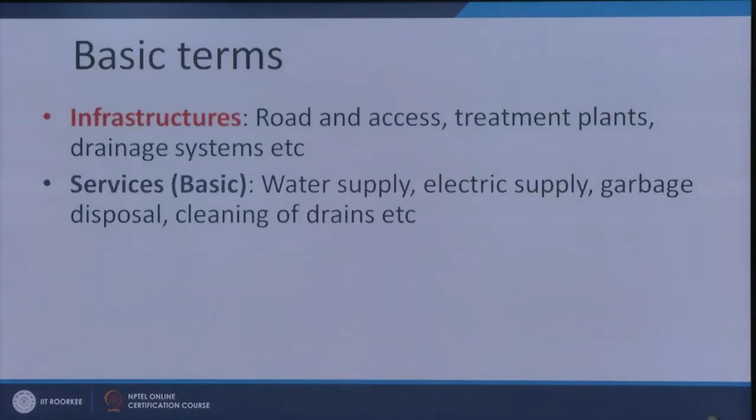But apart from the physical infrastructure, there are community facilities, which are required as an essential part of housing development. These community facilities are sometimes called social infrastructure, but they also need substantial land space and substantial investment to make it livable, to make better quality housing development. So, we discussed the objective of infrastructure is creating basic infrastructure, providing facilities and amenities and delivering accountable service. These are the basic terms we mentioned. We are not going into much detail today.

We mentioned that infrastructures and services are planned at various levels, starting from the city level to the local level, and these are the norms we mentioned: URDPFI guidelines, NBC National Building Code, Electrical Code, CPHEO manual, which is basically the public health manual dealing with sewerage sanitation and waste management. And apart from that, there could be local rules and regulations framed by the municipal authorities and development authorities from time to time.

So, after that let us see some of the norms of social infrastructure. When we say social infrastructure, there are educational infrastructures, from the very elementary school to the technical college or the university and college system, and the health system, from neighborhood clinics to the district hospital or sub-district hospital level, and also there are community facilities. So, we are going to show you some of the norms for social infrastructure given in the URDPFI guidelines, Government of India.

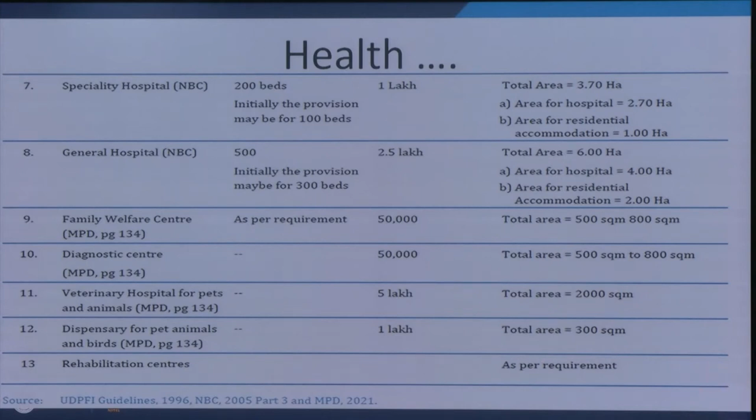So, a specialty hospital can come at 1 lakh or more, a general hospital at 2.5 lakh; usually the general hospital comes for a mid-size city of 2 to 5 lakh population. A family welfare center can come at 50,000 population. Apart from all these facilities, a separate diagnostic center could be there; private or public authorities can develop such centers. Then veterinary hospital for pets and animals, and rehabilitation center; these are different kinds of health facilities required for different housing or township development.

In the later part of this lecture series, we will discuss the old age home in greater detail, but please take note that earlier we used to treat this as a cultural facility, but now we treat this as a very important housing typology, because over the period of time this typology is going to increase and there will be more requirement for old age homes.

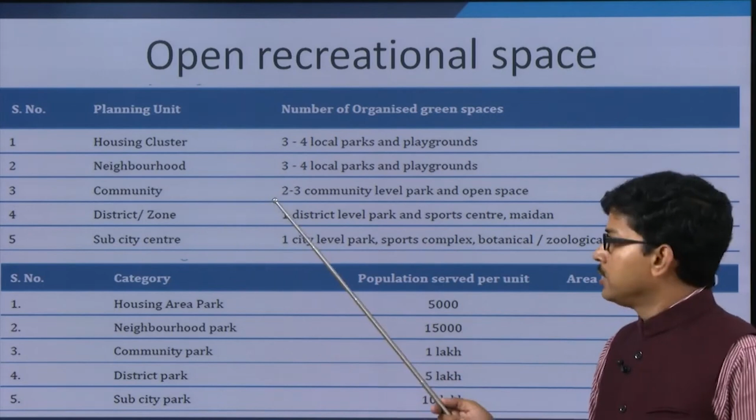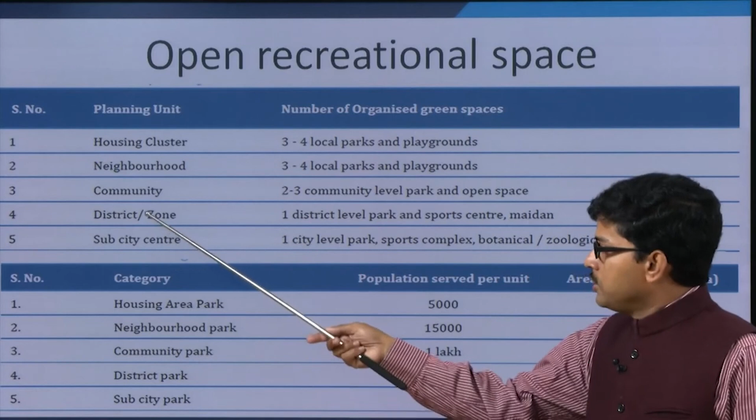At the community level, sometimes we call it a sector or block, the name can be different, but the concept should be clear. The community level park should be serving about 1 lakh, it can be a little less than that also based on your planning of the city, and it will have 5 hectares of area. Similarly, we have district or zone or sub-city level parks, which are much bigger than the lower level. You can see 25 hectares and 100 hectares.

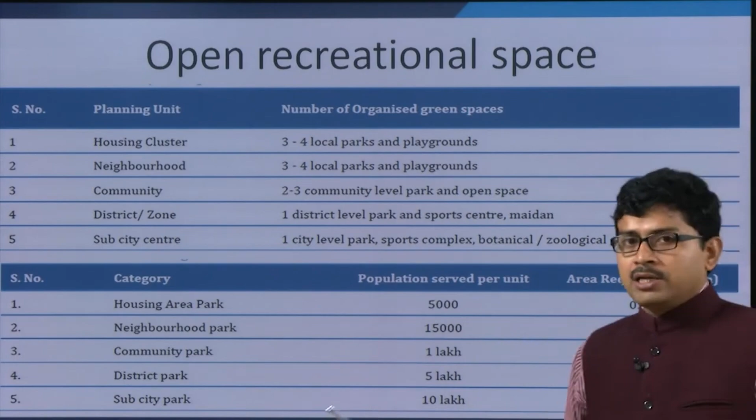So in a city or in a housing area, the overall area required for the green areas ranges from 10 to 15%. So it is not a very small amount of area. Out of 100% of the total area, 50 to 60% goes to net plot of the residential use, net plot for the housing, another 10 to 15% goes to traffic and transportation, another 10 to 15% goes to open recreational area, and the remaining areas are meant for the other community facilities including health, education and commercial areas.

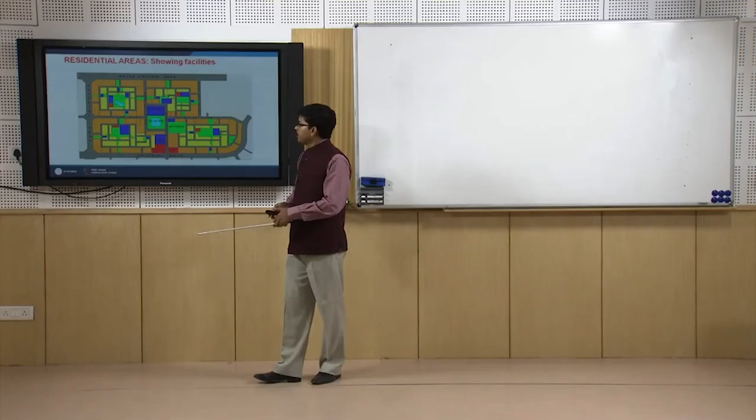So, we see this picture again. In the last lecture also we took this example, the typical layout of a neighborhood cluster. Here we can see that 4 neighborhoods are there, the plot layout plan 1, 2, 3, 4, and the blue colors you can see are the educational facilities: these are the higher secondary schools, these are the primary schools within the neighborhood, and the small blue areas are the elementary schools.

Similarly, the red colors show the commercial facility at the sector level or at the neighborhood level, where the convenience shops will be, and similarly the green and the blue show the open areas at different levels.

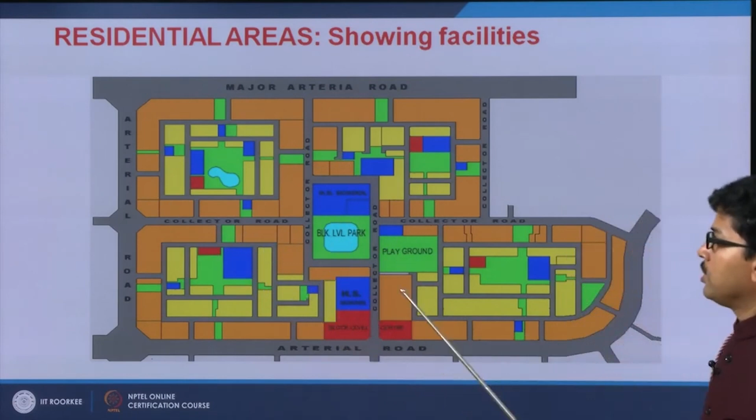These are the centralized open areas at the sector level, whereas these green areas are servicing the neighborhood and the cluster. For example, this green area is servicing this cluster, so that people from this side and that side can come and enjoy, whereas this green area and the water body can be enjoyed by all the people living in this neighborhood. So, this is an example by which you can understand how the social facilities are placed and how the local roads are connected with the residential area.

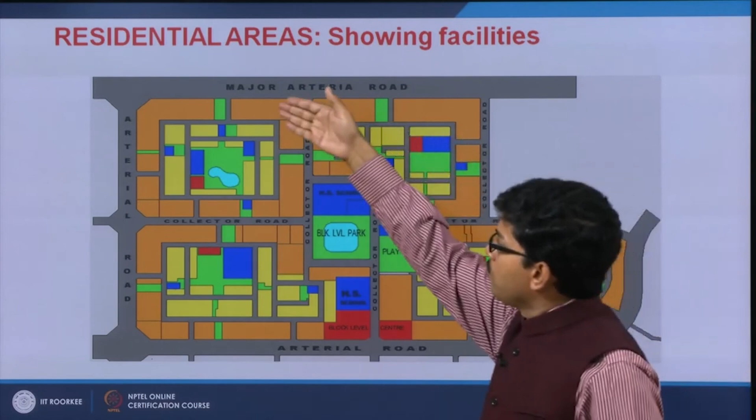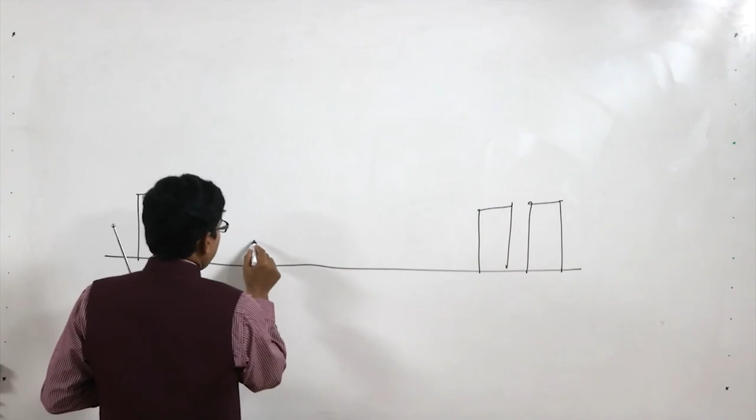Now, last discussion we discussed the development control. You can see that here we have used two sets of colors for the residential area, one dark yellow and one lighter yellow. These two colors show the different prescribed heights of the buildings. By and large, the concept is that if this is a neighborhood, then your peripheral buildings could be high rise and your internal buildings could be a little low rise, and this could be road. And the internal space could be used as a green area.

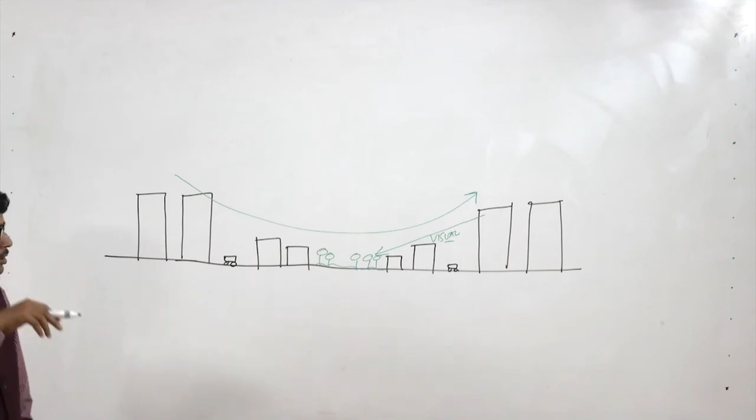So, this is done to ensure adequate light, ventilation and visual continuity, so please connect with our discussion related to the building controls and the urban design. Based on that, two different types of building typologies or building envelopes are considered and placed at the periphery and the center of any neighborhood. It could be different also, it is just an example to help you understand how it works.

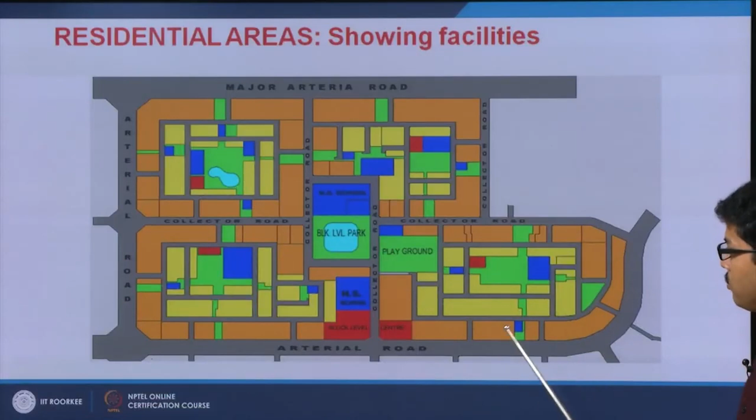Not only that, in the internal layout of the neighborhood, you can see that local roads are there. Local roads can be connected with other local roads, and a local road can also be open ended, or close ended, which we call a cul-de-sac, which will serve only the internal plots. So how these local roads, the space for the community facilities, and green areas act together, that is a very important thing to see.

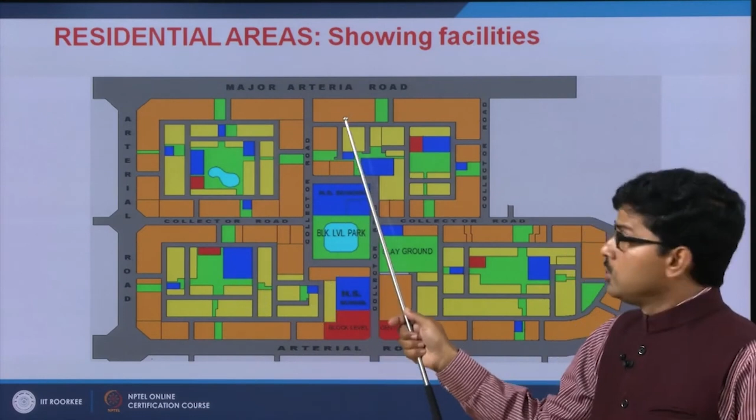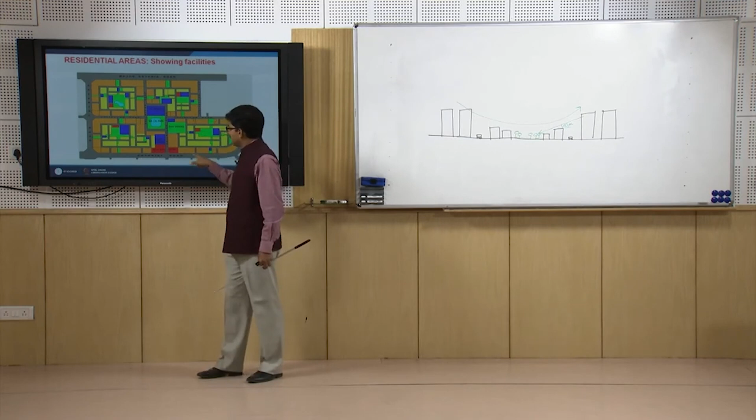Another very important part to be observed is that the major arterial road, the arterial road and the subarterial roads are also connected with the local road and the collector road, but these will not open up into the main carriageway, they will open up only into the service road. Please recall our discussion in the last to last lecture when we displayed the typical section of an arterial road, subarterial road and local road. So this connection of the local road and the arterial road is not direct, so this is not an intersection, this is only meeting with the service road.

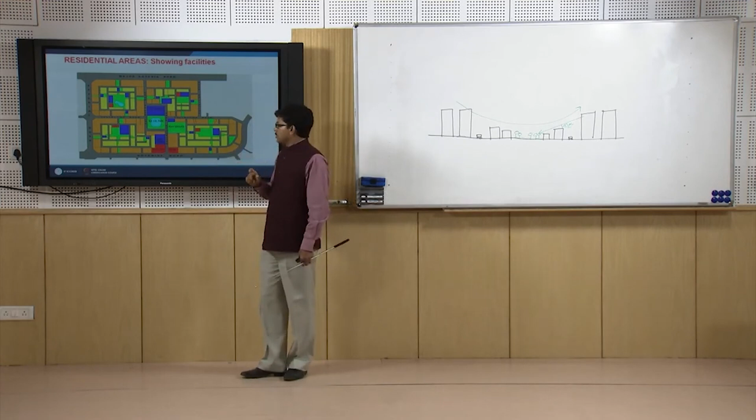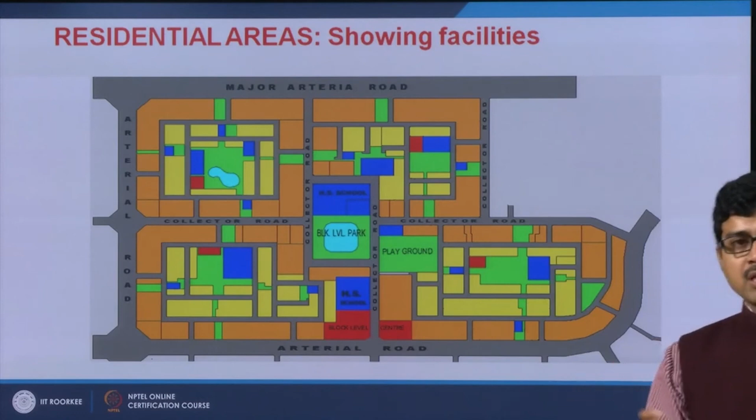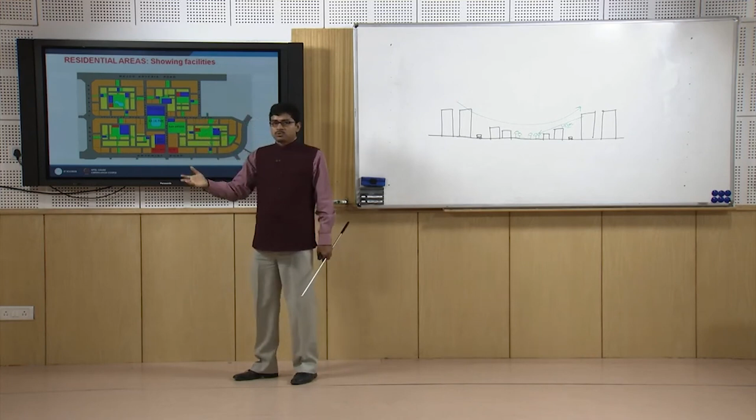So that is how we physically try to figure out any housing area meticulously, plot by plot, parcel by parcel, so that after this exercise we can take a parcel of land and give it to the developer and tell them, okay, develop the housing project of this many units, this is the density prescribed, this is the FAR prescribed. Without this exercise, without the land subdivision, without the allocation of the physical and social infrastructure and the network, we cannot go to the next level of the process, housing development. So from the land use plan or the planning of a city to the housing development at the project level, these are the necessary steps.

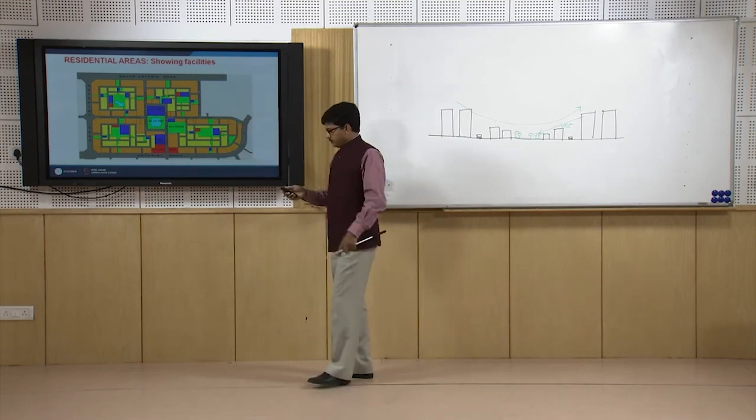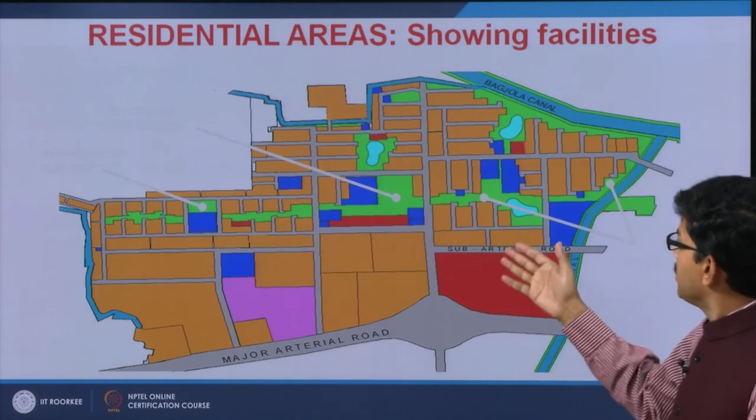Similarly, this is another example you can see here also. These are the areas for the schools or the health facilities, this is the commercial facilities, and these are the green spaces, where green spaces are considered to be a continuous space, and these are the network of the local roads. So to plan for the social amenities and facilities, the basic challenge is how to maintain the basic norms and standards.

The space standards given by the URDPFI guidelines are indicative, but if you want to follow all the space standards, sometimes you might end up in a space crunch. You will find that so much land is not available in your overall area, or maybe that you don't need so much area. So how can you achieve a balance without creating any imbalance in the distribution of the various kinds of social facilities, and provide all categories of social facilities? That is the basic challenge, how much you can maintain the prescribed norms of the facility.

The second part is equitable distribution. The examples I showed demonstrate how the facilities are distributed in such a way that wherever your plot or house is located, you can come and avail those facilities, whether it is the green areas or any community facilities. So, physical distribution of the facilities. Then optimizing land and resources. Land is a very important and very crucial resource.

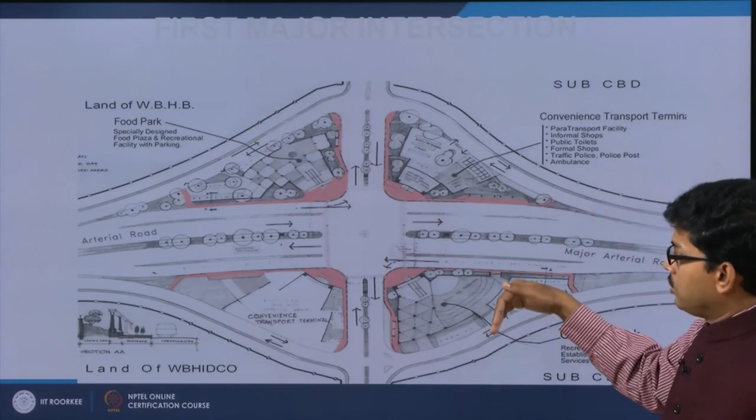So in this project we also considered how we can bring that element into the planning and keep some area for the community facilities. Like this is a typical plan of a junction. You can see that the typical junction usually consists of a major road and a minor road, but we kept additional roads on both sides of the 4 quadrants of the road junction.

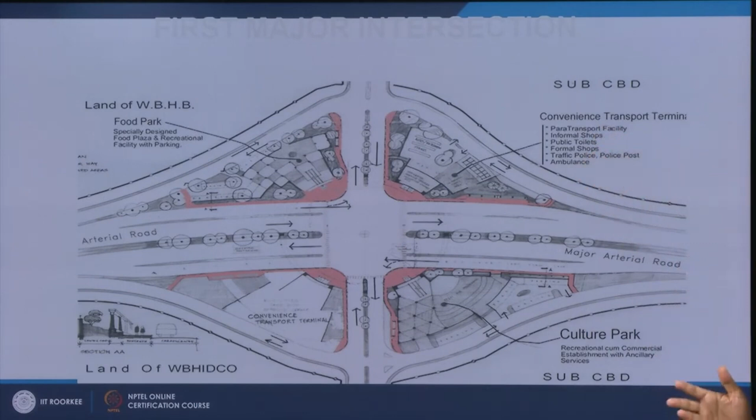And these junctions are acting as a space for, you can say, the convenience transport terminal to accommodate the paratransits or the public conveniences, to have some areas where some public functions, some informal street gatherings or informal activities could be there. These kinds of areas could act as a transport terminal, and here there could be food kiosks, there could be small shops and the kiosk element. So this kind of element could be accommodated.

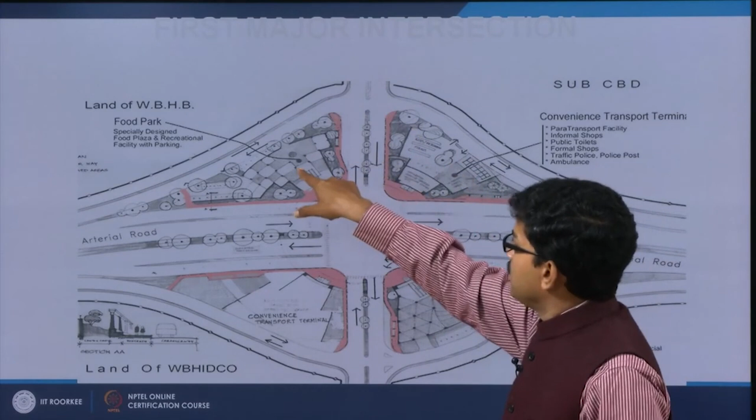Not only that, the pedestrian pathways can be integrated with the bus stoppage and the transport terminal and the community facilities given there. And another part, you can see that the service road is connected in such a way that it is not hampering the movement of the major arterial road, as well as it is giving the access to the paratransit and the culture and the food kiosk in the other quadrant.

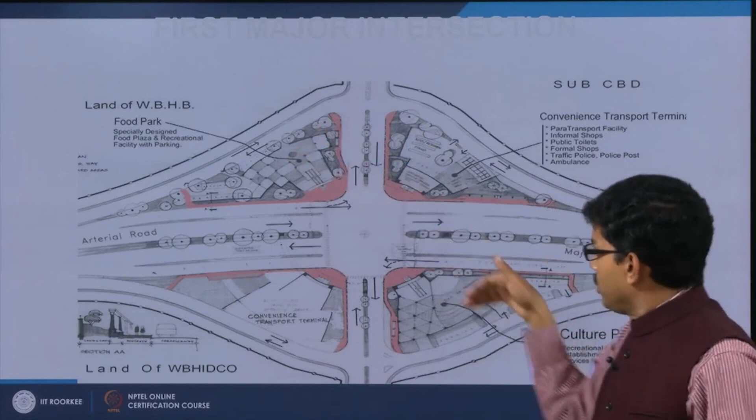So this is how we can accommodate the informal facilities and amenities in common areas like nodes and junctions without wasting much area and without affecting the physical space, because if we do not provide this space, eventually these facilities will come here anyway, 20 auto rickshaws will stand there. We can no longer allow that. So to prevent that kind of situation, chaos and congestion, we have provided the areas in the 4 quadrants of the road.

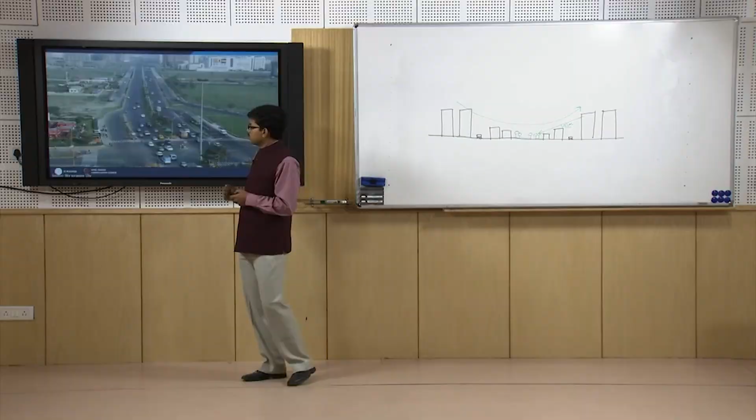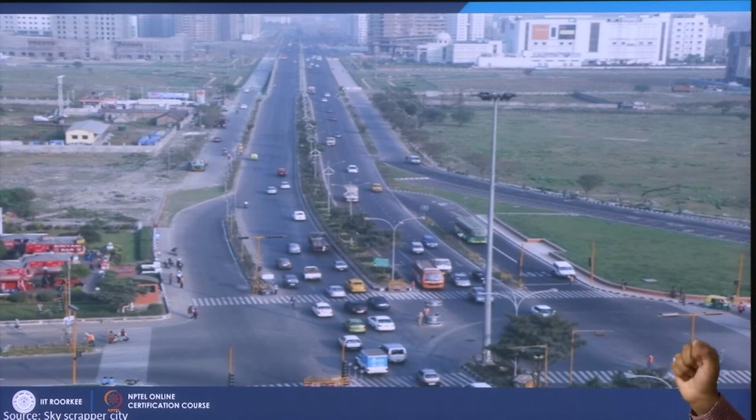This is the current situation of that particular junction. You can see that some shops have already come here, and this is the area for the bus lanes. The bus will come and stop there, the loading and unloading can happen there, so that the main carriageway becomes free. The service road will go from different sides like this and connect to other parts. These are the areas kept for the kiosks, the food and the paratransits. So this can be a very important planning exercise. You should take a very important learning note from these cases.

So having said that, the next lecture will discuss the housing strategy, how we will combine all these elements in a strategic document for a city: the infrastructure, the development control, the land use, its prescription, everything. Before I finish the lecture, let me quickly summarize what we discussed. Today we discussed the social infrastructure or the amenities: the educational facility, health facility, community facilities at different levels, from the building level to the block level, the cluster level, the neighborhood level and the city level.

And the basic challenge of designing and planning these facilities is the equitable distribution of the facilities over the space. The second is to maintain the standards prescribed by the codes or norms like URDPFI, because land is very scarce. So how we can prioritize the facilities, and after giving the priority we can maintain a balance for all the facilities, so that nobody is deprived of any facility. The facilities should be equitably distributed over the area, so that everybody, irrespective of caste, gender and economic strata, gets equal benefit.

And also the optimum utilization of the land, because land is a very scarce and pricey commodity. So optimum utilization of the land is very important for the designing of these community facilities. After that, we ended the discussion with the essence of the informal facilities and amenities required at the housing development or at the city level for the people in a country like India.